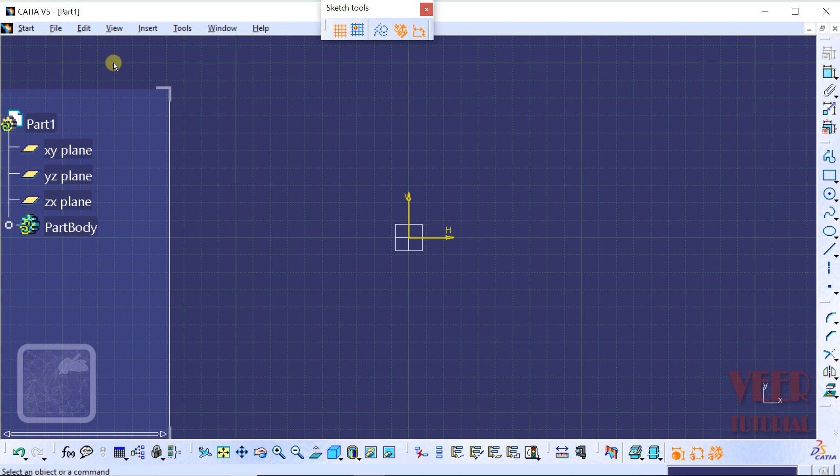Now to understand this command, I go to file, click on file, and go to open. From your project file, you need to open this file, that is corner. Click on this corner file and click on open. In this file we have created a rectangle and we have a series of lines.

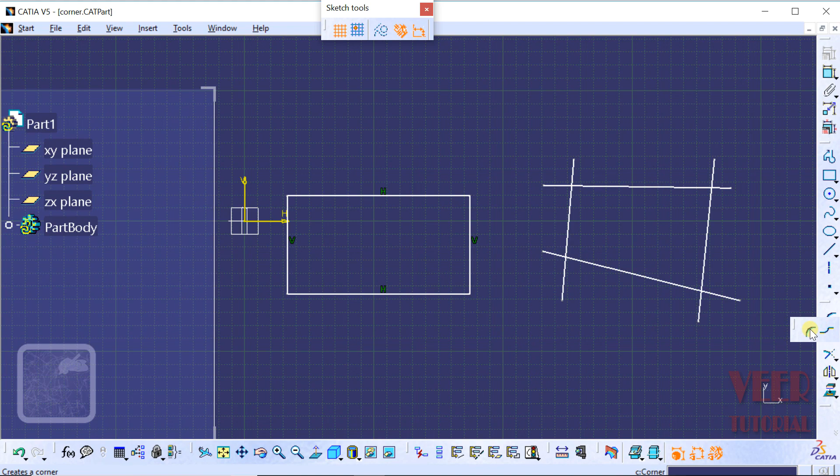Now I click on this corner tool, and then corner. In the command toolbar we can find 6 options. The first one is trim all element. For this we need to select 2 lines. These 2 lines should be adjacent to each other, meaning these 2 lines should touch each other.

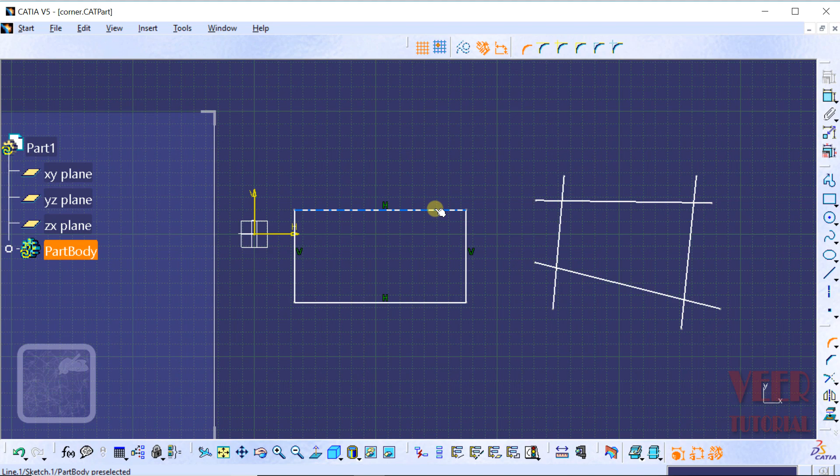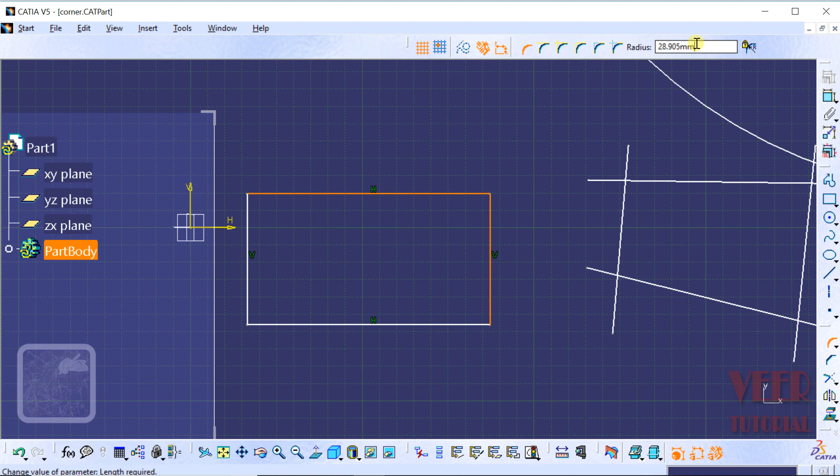So I go to this rectangle and select this first line. Let me zoom in onto this. Select this first line and then select the second line, and then we can see the preview of an arc. Take the cursor inside this rectangle and we can see the arc. We can define this arc by its radius, so we can insert the value of radius from here. I take this value 4, press enter, and then we can see it has created a fillet onto the corner.

Once again I will select this corner option. The next option we can see is trim first element. So basically what happened in trim all element is it has trimmed all the lines, and all these lines are replaced by an arc.

In the second option, trim first element, select the line and select the second line, then insert some radius. We can drag this, and I click here, and now we can see it has trimmed the first line. The first line we selected was this horizontal line and the second line is the vertical. So it has trimmed the first line, and the second line is not trimmed. Now we can insert the value of radius. Just make a double click on this dimension and insert this value.

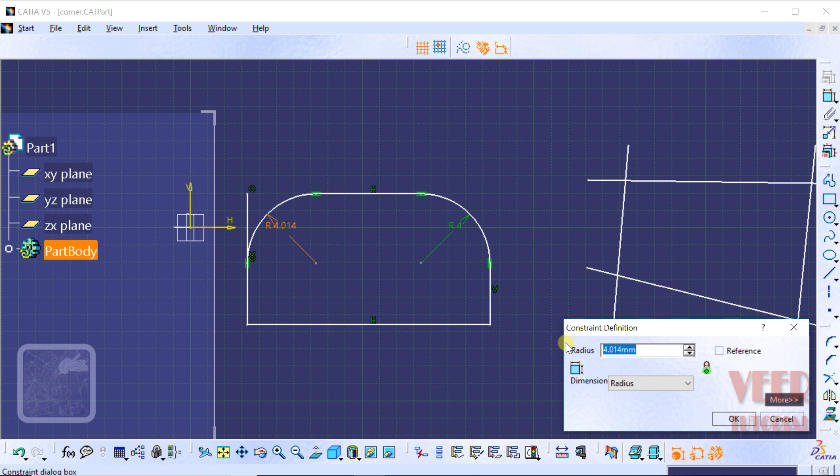We can select this dimension as a radius, or we can select this as a diameter. Generally arcs are specified by the radius, so I am specifying this by radius. Insert this value 4 and then click OK. And then once again I select this corner.

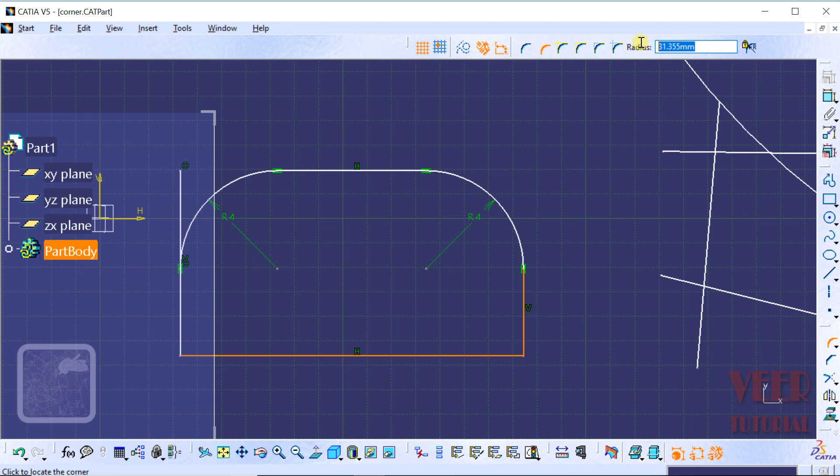So next option in this corner tool is no trim. This time I will select this first line. Let me zoom in. I select this first line and this is the second line, and then insert the value of arc. I'm selecting the radius, that is 2, press enter. And this time we can see the line has not been trimmed.

So we will continue with this arc tool, and this time let's go to this figure. Select this corner option, and I am selecting this option of no trim. Select this first line and the second line, and then place this dimension. Now we can see the lines are not trimmed. That is the advantage of different options.

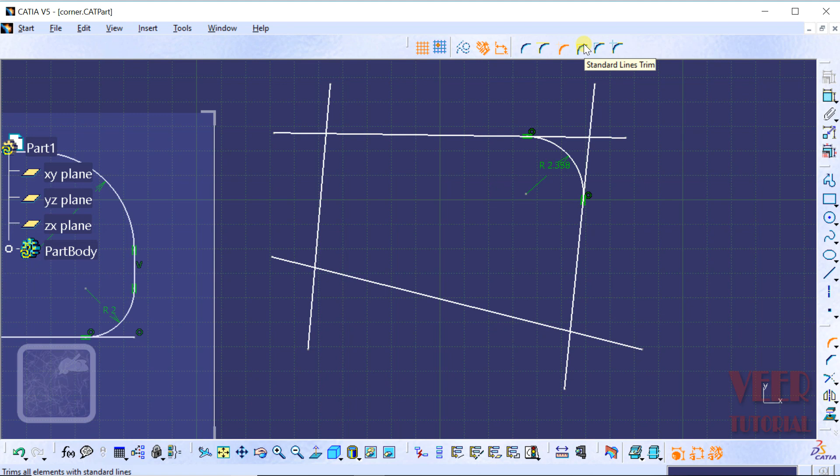Once again I select this corner. Next option we can see is the standard line trim. Let's see what happens when we select this option. Select this option, select the first line and select the second line, and place the radius, so I am placing this inside. Now we can see the extended lines have been trimmed, but the intersecting line has not been trimmed. So the lines that were extending are trimmed, that is the difference of this tool.

Next, I go to corner. Next option we can see is the construction line trim. What happens in this option is that the extending lines will be converted into a construction or reference line. So I select this option, select this first line and select the second line, and then place the radius. I am placing this here, and now we can see the extending lines are now a construction line. We can see these lines in dot dots, meaning these are reference lines and they are not a part of the sketch.

Once again I go to corner option, and the last option we can see is construction line no trim. As the name suggests, lines will be converted to construction line, but there will be no trim. Click on this option, select the first line, select the second line, and place this arc. Now we can see the lines have not been trimmed, but they have been converted into a construction line.

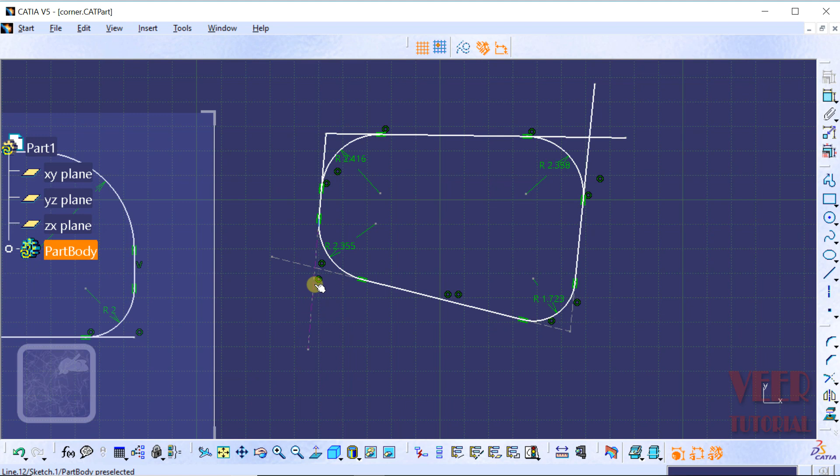So that is the corner tool, and we have covered all the different options in this corner tool.